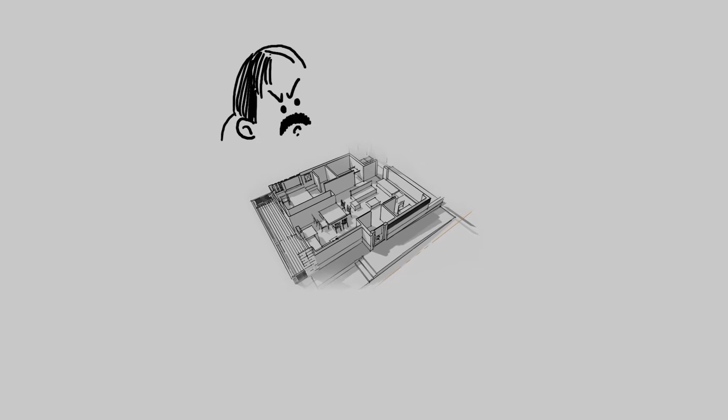Team Shunya is trying to create a sustainable and affordable way to meet the growing energy and housing demand. Through a successful demonstration of our concept, we aim to change the perception of the building industry, policymakers, and the general population towards sustainable housing.

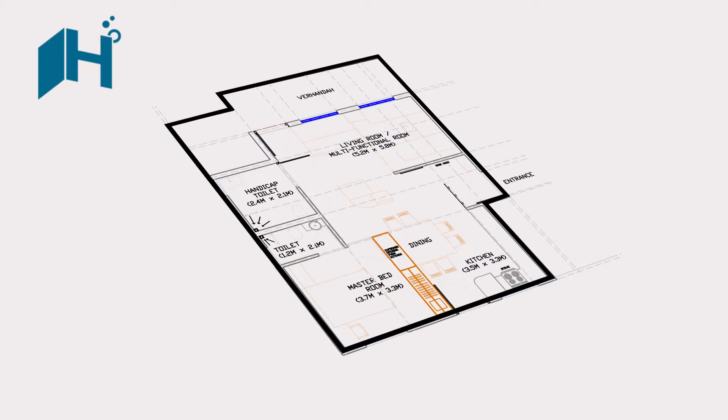Our house is named H0, a 70 square meter house designed to accommodate up to 6 people. It is a quintessential Indian home optimized for a typical urban Indian family unit of a couple, 2 children, and the grandparents.

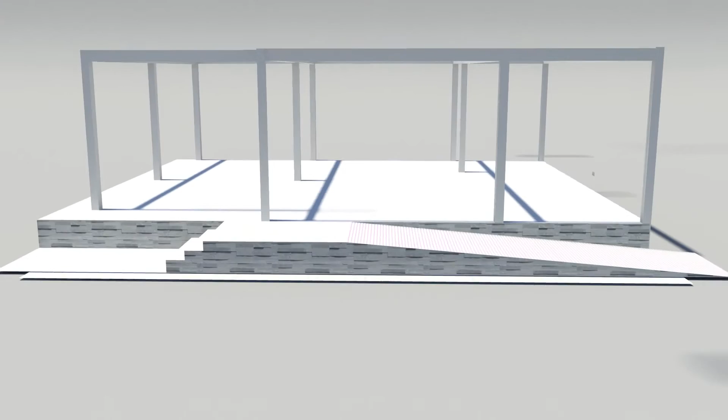H0 has a bedroom, 2 bathrooms including a handicap-friendly one, a kitchen, and a wide, spacious living room. The house is a steel-framed structure with walls made from prefabricated insulated panels. The panels interlock easily, providing ease of construction and thermal comfort.

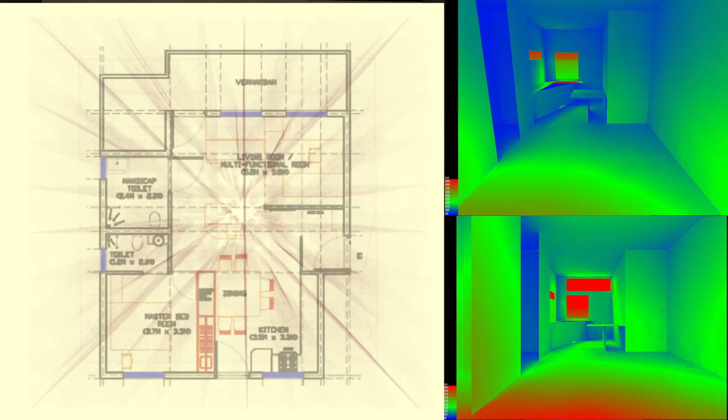The spatial arrangement of the different rooms was arrived at by combining modern techniques of simulation with the age-old principles of Vastu Shastra, the ancient Indian science of architecture. Multifunctional spaces and modular furniture provide a compact yet comfortable living space.

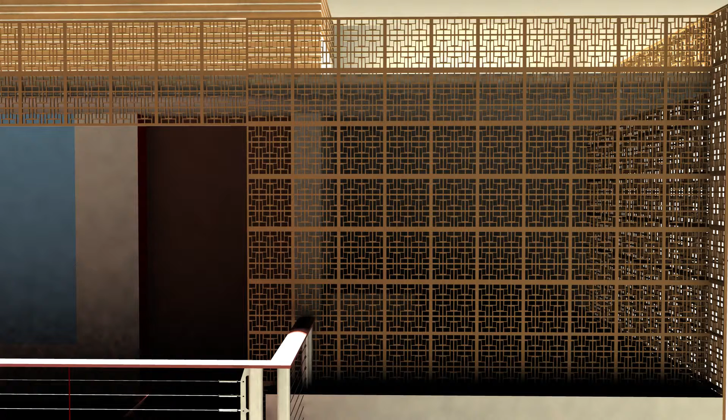We have used the Indian concept of a veranda, which acts as a buffer space and minimizes heat gain. The jali, another traditional Indian element, induces ventilation while providing protection from radiation. Passive solar architecture and natural lighting design ensure that the windows, walls, and spaces reduce the artificial cooling requirements.

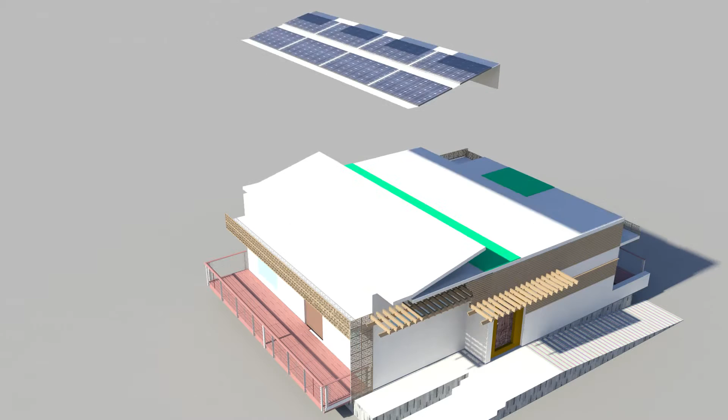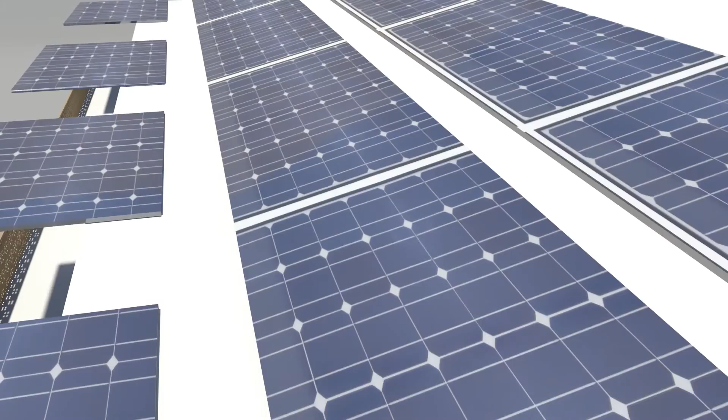The roof has a 5 kilowatt peak photovoltaic system to meet all the electricity requirements of the house. A novel PV thermal system provides hot water for bathing, washing dishes, etc. Being a net energy positive house, it supplies more electricity to the grid than it consumes.

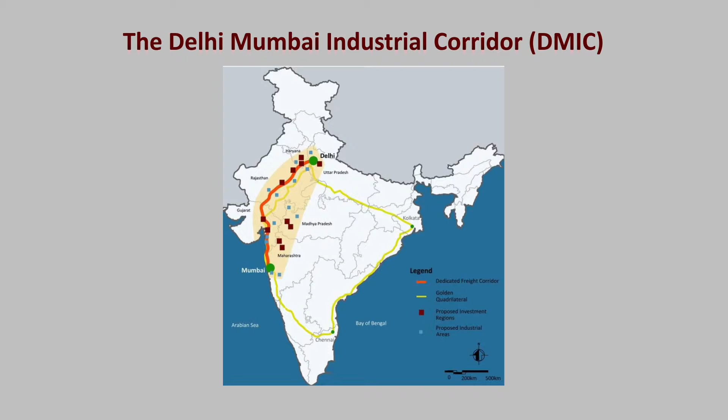H0 will be a part of a 4-storied building cluster, ensuring a high standard of life and a vibrant culture. With the rapid development of India, the major cities are getting saturated, and the peri-urban areas are emerging as the new growth centers. The proposed Delhi-Mumbai Industrial Corridor, which connects 2 of the country's biggest nodes by road and rail, will see a substantial growth in industries and, as a result, jobs.

Lying along the DMIC, very close to Mumbai, is Uran, making it an ideal site to show the application of our concept. Projects such as the DMIC, coupled with our housing model, will make India an inspiration for all developing countries to grow in a sustainable manner.

Team Shunya, building a sustainable future.